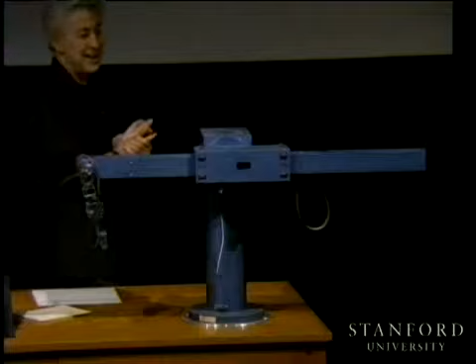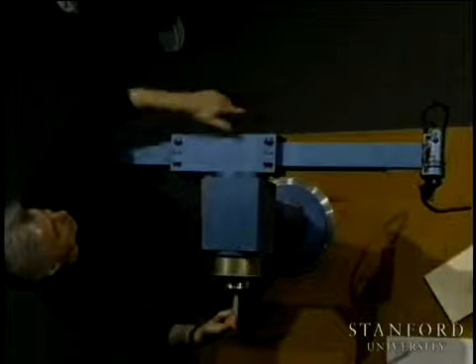Now, over here you have the Stanford Scheinman arm. We saw the Stanford Scheinman arm in pictures many times, and this is actually one of the early arms that was built in the early 70s. You can see here the first joint, the revolute joint, about this axis. Then there is another joint, which allows us to rotate up and down.

I'm not going to be able to actuate it because it needs to be connected to the controller, so we release the brakes. There is a brake right now that is blocking it in the horizontal position, and I imagine you understand why—otherwise it will slip because we have the third joint, which is a prismatic joint.

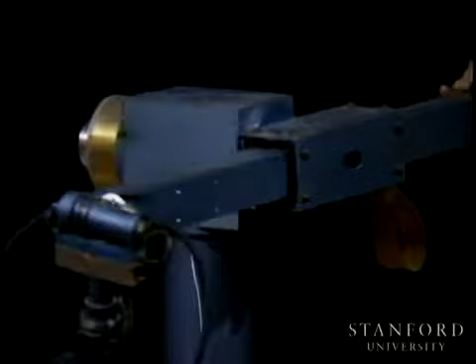The prismatic joint is really an interesting feature about this arm, because you can now take this end effector and, once you decided the direction, quickly reach in that direction and advance the arm. Well, this has a limitation: you can move up to here, and you have another stop about here.

I mentioned about the wrist, and the wrist is here, and it has 3 degrees of freedom. So if we look at this wrist, you can rotate it about this axis. You see this motion? This is joint 4, and joint 5. And joint 6, which is this axis.

So something very interesting happens when joint 5 goes to 0, and this is what? Singularity. And it's really difficult to see exactly what that singularity is, so I'm going to try to illustrate it.

The idea is, when you go to joint 5 equal 0, this is the zero of joint 5. What happens is, this axis of rotation number 4 and the axis of rotation number 6—do you see them? One like this and one like this. These two axes become collinear, right? So for this position and orientation...

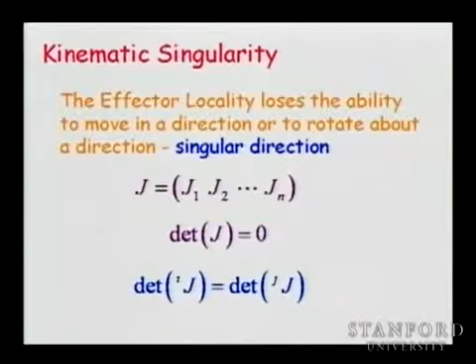Is it because the determinant is preserved by conjugation by another matrix? Yeah, by the rotation matrix. Because to go from a Jacobian in frame J to a Jacobian in frame I, all we need is to pre-multiply by a rotation matrix like this. So if you are in the 6 by 6 spatial case, linear velocity and angular velocity, the Jacobian in frame A can be transformed into a Jacobian in frame B by pre-multiplying the Jacobian with a matrix that has 2 blocks of the same rotation matrix that transforms the descriptions from A to B, and that will give you the matrix in B. Now if you take the determinant of these, the determinant of the Jacobian in B is equal to the product of the determinant of the two matrices, and since these matrices are orthonormal, their determinant is 1, and that means we have this relation. Okay? Okay, good.

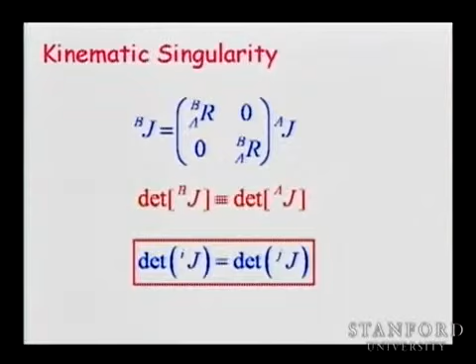Remember this, and remember that you can use it to simplify the expressions and immediately analyze your determinant. Now, once we set the determinant of the Jacobian to 0, we immediately see the singular configurations, because in the expression of the determinant, as I said, the determinant will come up as a product of expressions S1, S2, S3, etc. Each of those expressions, when it vanishes, makes the determinant equal to 0. So if you have multiple singularities, they are here, and you just set each of those expressions to 0 and you get your singularity.

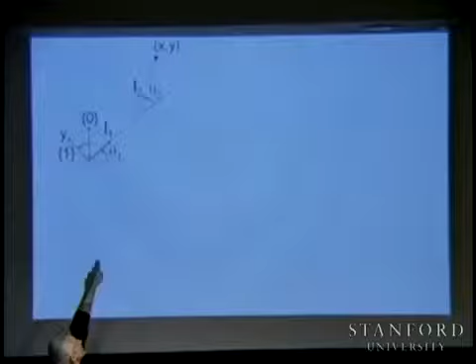Let's take the simplest example possible, which is a 2 degree of freedom mechanism, and see if we have a singularity for this Jacobian. Do you see a singularity here? Which is where? When theta 2 goes to 0 or to pi or k pi, you align the 2 points and you're going to have a singularity. Let's see it in the mathematics.

So I'm going to take x and y. X equals L1 cosine theta 1 plus L2 cosine theta 1 plus theta 2. You remember all of that. And now if we differentiate, we have this Jacobian, right?

As I said, if we determine our expression for the determinant, it comes to be L1, L2 sine of theta 2. And this vanishes when the sine of theta 2 is equal to 0, which corresponds to all the configurations when Q2 is equal to an integer times pi.

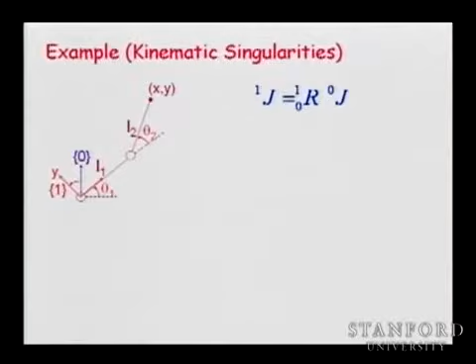So, as I said, you see the Jacobian here, you see its expression. Well, it will become much simpler if we write it in frame 1. To take it to frame 1, we pre-multiply this Jacobian by the rotation matrix 0 to 1. We are doing the rotation in the plane, so it is a 2 by 2 matrix. Don't be confused, all right? So we're just doing it in the plane. And at singularity, this is the singularity when we move the last link to be aligned with the first one. Well, in that configuration, when the sine vanishes, this is the Jacobian.

The notation, when you say cosine 1,2 versus sine 1,2 versus sine 2, what's the difference? So here we say cosine theta 1 plus theta 2, and we denote it C12. Or S12 would be the sine for the sum. Just to simplify, to have a more compact representation.

So this is what is happening. So what do you see here? You see directly how these two columns are dependent, and the rank of the matrix is equal to 1.

So if we think about the displacement delta x and delta y associated with this configuration, if we make a small displacement delta theta 1, delta theta 2, what would be the displacement delta x and delta y? Well, we know delta x is equal to the Jacobian times delta theta. So you multiply, and this is what you obtain. Delta x is going to be 0, the first row is 0. And the second row, I'm multiplying with delta theta 1 with the first element, and delta theta 2 with the second element. You see this? You understand this? Okay, what does it mean?

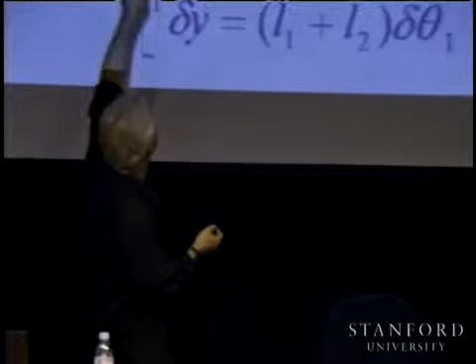For any delta theta 1 or delta theta 2, delta x is going to be equal to 0. And the reason for that is the fact that when we are in this configuration, and when we make a small displacement delta theta 1, if we rotate about this axis, this point will move on the tangent of this circle, right? If you rotate about this axis with a delta theta 2, you go on this tangent. That is, whether we move delta theta 1 or delta theta 2, both of them are contributing to the displacement with a small displacement along this tangent. So there is no displacement that will take place along this direction. And that's why delta x is equal to 0. Do you see that?

How did you get the Jacobian in the last slide? How do we get this Jacobian here, in the last slide? Well, differentiate.

Well, I thought we're done. How do we obtain the Jacobian from x and y?

This is going to be just the linear Jacobian, JV. So we differentiate delta x. The first column will be what? Partial derivative of x with respect to theta 1. So it will be minus, okay?

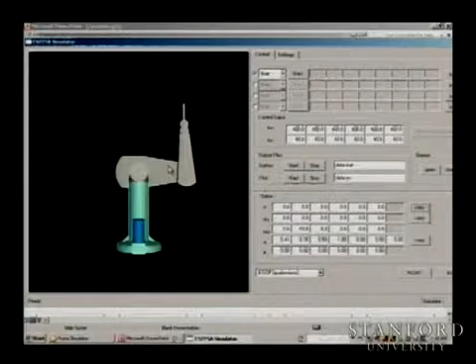What is the name of this robot? The Puma. Very good. So right now the Puma is floating, so if I apply a force to it, it's going to rotate. It's floating.

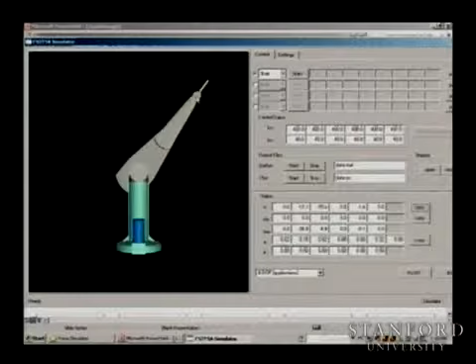So I'm pulling like this, I'm pulling like this. If we pull here, what is this configuration? If you try to move the Puma in this direction, you apply a force, it's not moving. If you try to move in this direction, it moves because there is a small angle, but if this angle is straight, then you apply a force and there is no motion.

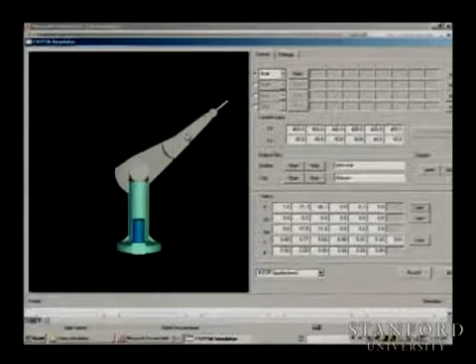And this is the singularity. When you extend the arm, you cannot move along this direction. So if you apply any force in this direction, immediately you have a motion. If you apply whatever force you apply here, there is no displacement along this direction. Okay? You understand the singularity?

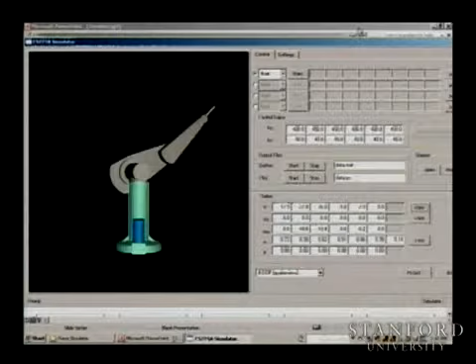Good. So let's close this window.

All right. So now you know the singularity, that configuration that we are calling singular configuration. But really the problem is not the singularity itself, it is the region around the singularity. Because when you come close to that singularity, you start to have a matrix that is ill-conditioned.

And if you try to make a displacement along this direction, so you were in this configuration, and if you are very close to it, you can move, but it's very heavy. It's going to take a lot of force to pull it and make this go up, the elbow goes up. So what I'm going to do, I'm going to take a small displacement delta Q.

Yes? The last slide, why is the Jacobian different, why is the top right L2S2 instead of L2S1? Can anyone answer this question? Instead of frame 1 instead of frame 0?

So this matrix is expressed in frame 1. No, as in that one is frame 0, right? No, the multiplication by 0 to 1. Actually, this matrix is multiplied by this to give you frame 0. So this is J0, this one here.

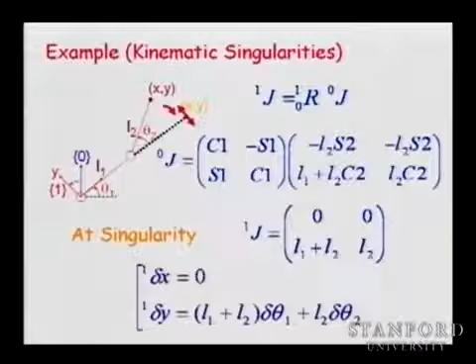All right, let's go to the next slide. So rather than computing the Jacobian exactly, I'm going to make a small approximation of the Jacobian, and compute delta Q that corresponds to a delta X where we are in that singular configuration.

So if theta 2 is equal to 0, very close to 0, so theta 2 is epsilon, you can write this inverse of the Jacobian. So what do you do if theta 2 is very small to approximate your sines and cosines? Sine of theta 2 when theta 2 is very small is almost equal to 0, and the cosine, 1. So if we do that and compute the inverse in frame 1, this is the matrix you will obtain.

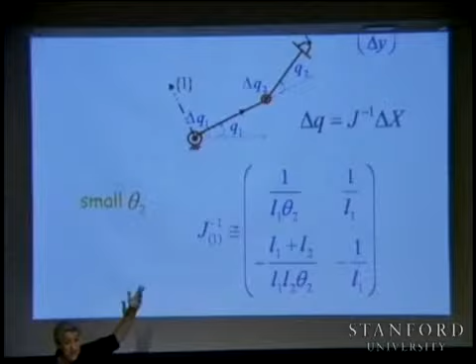And from this matrix you can find the displacement. To make a small displacement delta X, you can compute the displacement required for delta Q. So that means if we want to make a small displacement delta x1 and small displacement delta y1, this would be the expression for delta q1, and this would be the expression for delta q2.

So this is not exact, this is an approximation where we are working around the configuration theta 2 equal to 0. But it is very useful to look at it because as theta 2 gets smaller and smaller, you are dividing by 0. You can see that. So to achieve any delta x, you are going to have a large displacement delta q1 or delta q2.

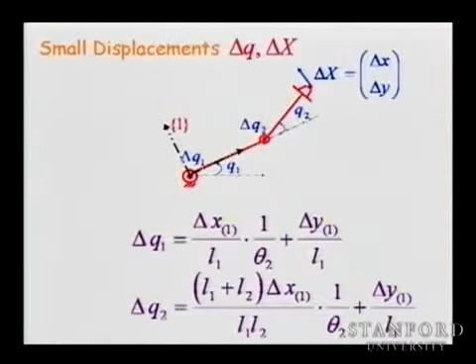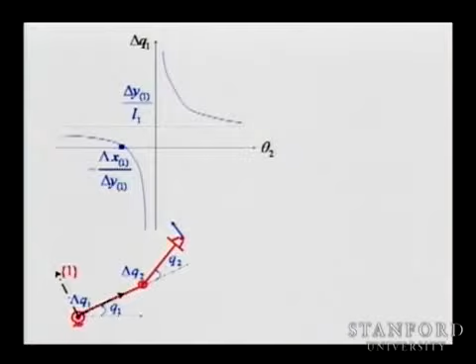Do you see that? In fact, if we look at it graphically, here is the configuration very close. If we look at displacement of theta 2 that comes closer and closer to 0, the displacement delta q1 increases. And the same thing if we come from the other side of 0, we have this discontinuity that means we have large values of delta Q1 needed, or large values of delta Q2 needed.

And when you get to the singularity, there is no amount of value, you need infinite value. So this means that we have to deal with the singularity not only at 0, but also around the region where the singularity is taking place.

Now, in your homework, in our discussions, we always place the problem in the spatial case. But often the robots you are dealing with are planar, and you have this large matrix, and you are going to study the Jacobian of a matrix that is actually non-square. This is the case if we take xy and we take the J omega 0,0,1,0,0,1, we end up with a large description with all these rows of 0.

So we talk about the reduced matrix that you can analyze in the case corresponding to a linear motion for a 2 degrees of freedom or a planar motion. So if you have the case of 2 degrees of freedom, your analysis is done on this 2 by 2 matrix, on the JV part. And you don't have a Z part, so it is just a 2 by 2 matrix.

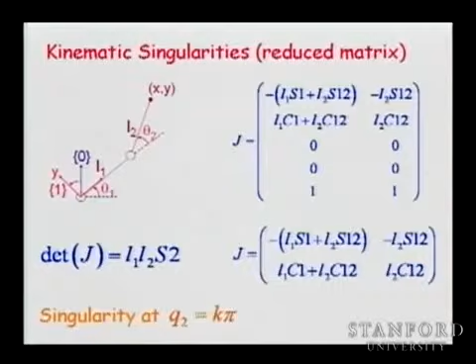In the case of 3 degrees of freedom, you are going to have a matrix like this: x, y, and z, and then you have the J omega 0,0,1. So the reduced matrix in the plane would be x, y, and the last row. Basically you are dropping those 3 rows. So this is your matrix, and you study this determinant, and you will be able to find the singularities associated with this 3 degree of freedom manipulator.

Why do you drop those 3 rows? Because in the case of a planar robot that has 3 degrees of freedom, the matrix that you're going to analyze is going to be x, y, and the rotation about the z-axis.

So you can do it actually with this matrix, but to analyze the determinant of this matrix, you do not know how to do it. How do you take the determinant of this matrix? So to analyze the singular configuration, you can do it from here by forming the matrix J transpose J and reducing it to a 3 by 3 matrix, which corresponds directly to eliminating the 3 rows. So the matrix on top captures the characteristics of rank of this matrix.

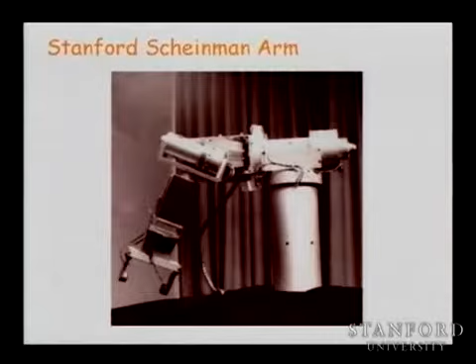All right. So here is the Stanford-Scheinman arm. We just analyzed the singularity of the Scheinman arm by looking at joint 5 when it goes to 0. And in fact, if we do this computation, we multiply the matrices, we do the differentiation. You remember we did this last time and we obtained this matrix.

Let's see what happens when theta 5 goes to 0 in this matrix. So could you tell me what is happening? What we're interested in is to see if there is immediately a dependency between columns, whether at that configuration columns become dependent.

So this is column 1, 2, 3, 4, 5, and the last column 6. Columns 4 and 6 become collinear. Let me write them for you. So the column 4 and column 6 are identical, which means you lost the rank. The rank of this matrix is 5. So you have a singularity.

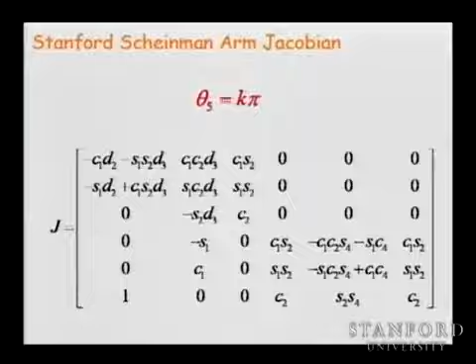This is both for computing x. So this x is x wrist, xw. And this x here is the x at the end effector, xe. So when we go from here to here, there is a constant vector. So xe is equal to xw plus that vector.

So now we're going to see how we transform the description of the Jacobian from a Jacobian associated with this point to a Jacobian associated with that point.

Yes? I think your mic fell off. I'm sorry? I think your microphone fell off. Yeah, you're right. I can see it. Thanks. Okay.

So essentially we have two frames. One frame associated with the frame we selected for the last link. In this case it was this frame, or the wrist point. And the second frame is this additional frame we are attaching to the end effector.

So now think about it. You have a vector connecting the origins. This is the vector Pne connecting the last link frame to this location of the end effector. Now, the linear velocities and angular velocities at that point are transformed to linear velocities and angular velocities at the end point. And the question is, what is the difference between the two?

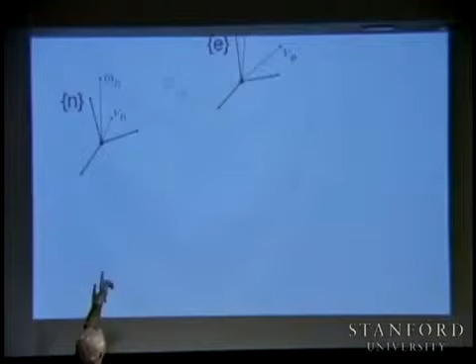So in terms of, if we go back to the robot, and if we think about it, we have some linear velocity here moving this point, and this at the same time is rotating with omega. So the question is, what is the omega here and what is the v here? Could someone tell me what will be the linear velocity at this point, given the linear velocities and the angular velocities that we know at this point? So given we know Vn and omega n, what is Ve and omega e?

They're the same. Okay, so omega e is equal to omega n? Everyone agrees? Alright, that's correct. And Ve is equal to Vn? Okay, who disagrees with that statement? How many disagree? I disagree too. Alright, so some of you still think it is the same velocity, Ve equal to Vn.

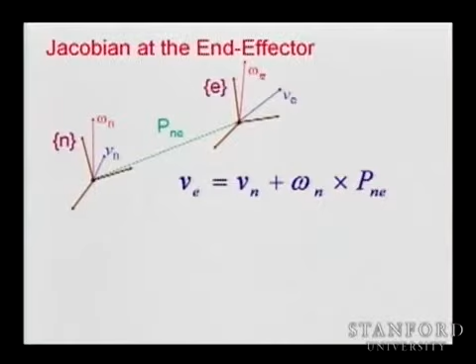You remember the apple? There is an additional velocity coming from the fact that there is an angular velocity here that is going to affect this linear velocity. Even if there was zero velocity at this point, Vn, there will be some linear velocity due to the rotation. So the relationship between the two is like this: Ve is equal to Vn plus omega n cross Pne. Alright? And the other relation is fine. This is correct.

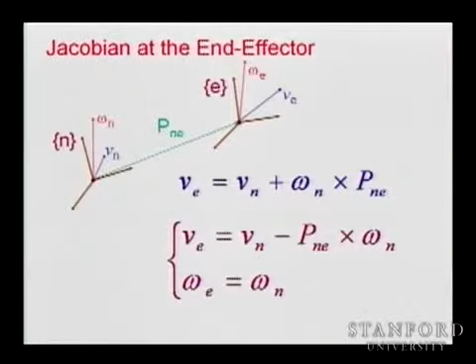So I wonder why I switch and put minus. Anyone knows? Yes, they mean the same thing if you cross something. It is the same, it is correct, cross them in the opposite direction. It goes the other way. It is correct. But so I just replaced that relation and put it in this form.

Why after this form? So basically, Ve, omega e is now linear in Vn and omega n. We put it on the other side, and the reason is I would like to connect the two. And do you see how we can connect the two? What is the relationship between the vector Vn, omega n as a vector and Ve and omega e as a vector? There is some matrix, and this matrix involves what?

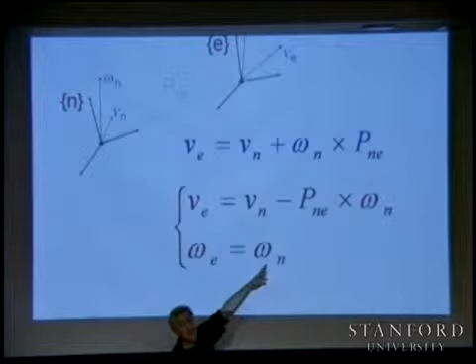Identity matrices, because this is identical, and Pne cross. What is Pne cross? How do we make Pne cross as a matrix? Exactly, so we use the cross product operator. So actually, this writing allows us to find this matrix, immediately connecting Vn, omega n to Ve, omega e. What is on the diagonal?

Because Ve is equal to Vn minus Pne, the first diagonal block is identity, and the second omega e is going to be identity times omega n, so there will be zero identity. What is on the upper block on the right? It is minus the cross product operator. So basically we have the identity on the diagonal, we have 0, and we have minus Pne hat.

So now we have a linear relation between the two, and it involves just this vector connecting the wrist to that point, and we are taking the cross product operator of that vector. Now, when we do this computation, you have to be very careful to make sure your Pne vector is described in frame n most of the time. It's just like a straight line along the z-axis, a small length along that z-axis, so it will be 0, 0, 7.

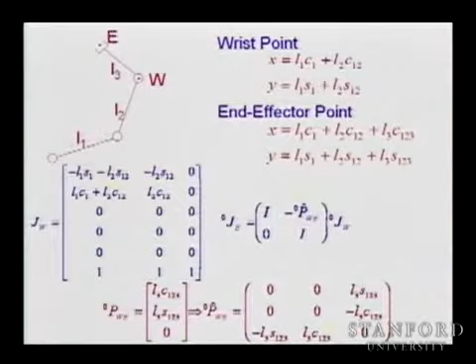There is here an example of a Jacobian computed at the wrist point, a Jacobian computed at the end effector point, and we are computing this vector w from e to 0. I'm going to skip it because we don't have time, but once you have it in your handout, go through it and you'll see you can compute Je from this Jw simply by computing this operation associated with the vector connecting w to e. And what we did is we computed p in frame 0 and found the operator in frame 0 directly. Please take a look at this.

So I'm going to move on because we are now going to discuss something important about the Jacobian. We already started to introduce this a bit, but the fact is the Jacobian is very useful not only to analyze velocities but also to control the robot. Most industrial robots are actually controlled just with the Jacobian, because this Jacobian is always connecting your desired position and orientation of the end effector.

You have some delta x here, and if you know how to control the joint motion, all what you need is to say, okay, I'm at this configuration, I would like to make a small displacement delta x. What would be the small displacement delta q? That can be obtained from the Jacobian, because the Jacobian gives you this relation, and if you are outside of the singularities, you can compute delta theta that corresponds to your delta x. This is the relation that can be used directly to compute the displacement delta theta to follow what you would like to achieve with delta x.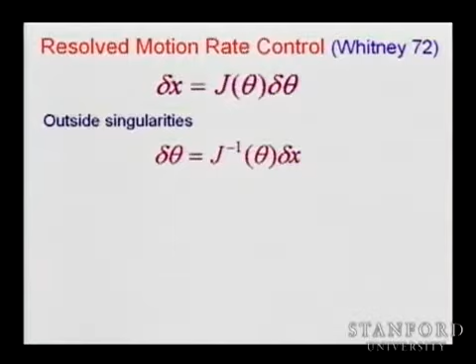You start from theta, you know theta, you know your x, you can compute it from the forward kinematics. You want to go to x desired, then you can compute delta x by taking x desired minus x. Hopefully this is small, so you can use the Jacobian. And then you can compute the corresponding delta theta to this delta x using this relation. Then you know theta, so you control the robot to move from theta to theta plus delta theta.

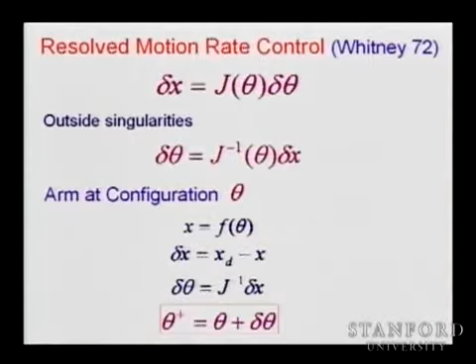You see this algorithm? Very simple. You measure where you are, you know your theta, you know your x, and you want to make a small displacement delta x. All what you need to do is to compute this delta theta from your Jacobian. So basically, you have a sort of controller that is using the Jacobian to compute this error between your desired position and measured position, computed from the forward kinematics as a function of your Q's, and that will give you a delta Q that will distribute to each of the joints and ask the joints to track.

So this is the resolved motion rate control proposed by Dan Whitney back in the 70s. This simple algorithm, if you don't really care about dynamics, if you don't care about force control, contact of the robot with the environment, this is fine. That will work, and if you are outside of singularities, this will take you through. But obviously it's not going to work very well because you're going to have problems with the accelerations. If you're tracking a motion, you will have a lot of errors. But still, if you have just small displacements and slow motions, this is going to work.

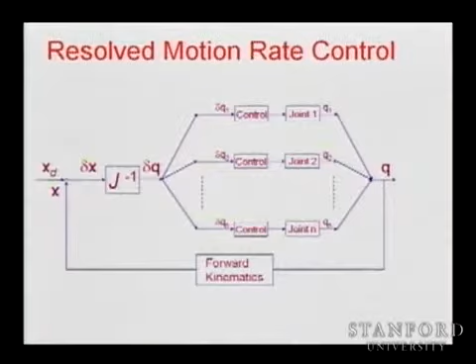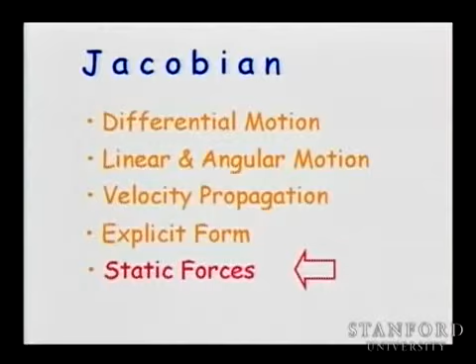The last point in our discussion deals with static forces, and again the Jacobian is going to give us the answer. We saw that with this Jacobian we are able to understand the velocities produced at the end effector given the joint velocities, but we're also going to see that the Jacobian is part of the relationship between forces exerted by the end effector and torques produced at the joints. The same matrix. So how can we start with this?

Okay, let's go upstairs. So now we're in the robotics lab. James was the TA, I took that photo when he was TA, but it was a couple of years back. So how do you open this door?

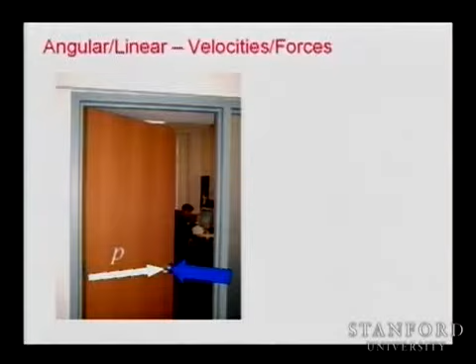Come on, we're doing it with the robot. So you take your hand, and after turning the knob, you push a little bit and it's going to rotate. You see how it's going to work? So let's analyze it. You're pushing here, at some location, and you have the axis of rotation. So there will be a linear velocity - you're pushing with some velocity, so at that point there is some linear velocity, corresponding to that velocity there is some angular velocity about the axis. You see that?

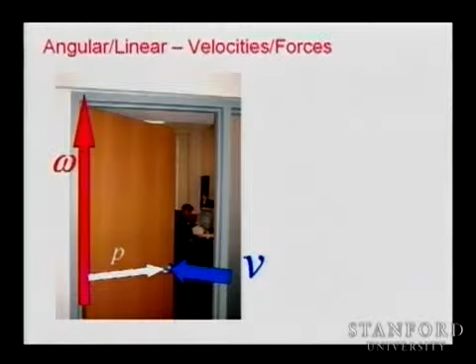Now we can also think about the forces I'm pushing with. The linear velocity is related to angular velocity by this relation, we saw this. The forces - if I apply a force here, there will be a torque. Actually, I could have this door actuated with a motor, producing a torque, and that corresponds to a force here, and there is a complete relationship between the two. Do you know what is the relationship between torque and force? The cross product, but in this way - the torque is equal to P cross F.

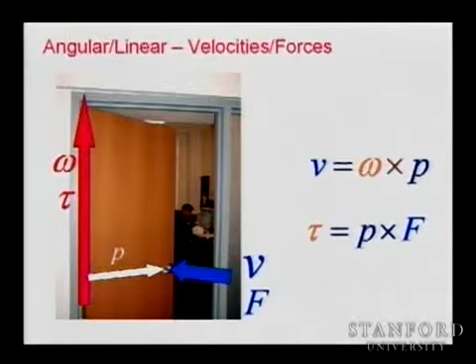So the torque now is on the other side and the F is on this side. So V and F, you see V and F, they are crossing in the two equations. Actually, the first equation represents sort of a Jacobian relating velocities V and omega, or theta dot. And the second relation is representing sort of the transpose of that Jacobian. And we're going to see that.

So let's go and analyze this. We have omega, we have linear velocity, and this is the relationship, we agree? Here we can write it in this form: we can say V is related to omega by minus P hat.

Torque - so if we want to produce a force there, you can apply a torque, and that would be equal to P cross F, which can be now represented by P hat F. Let's take that and put it really similar to this - so it's minus P hat, so it is identical to that. You see this transpose I'm writing? Because the operator is anti-symmetric, you get minus the operator equal the transpose. So I'm just writing minus P hat transpose. So basically this is the Jacobian and this is the transpose of the Jacobian.

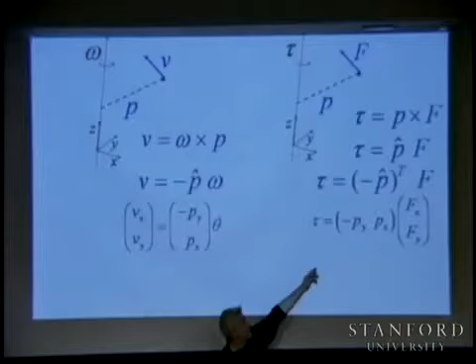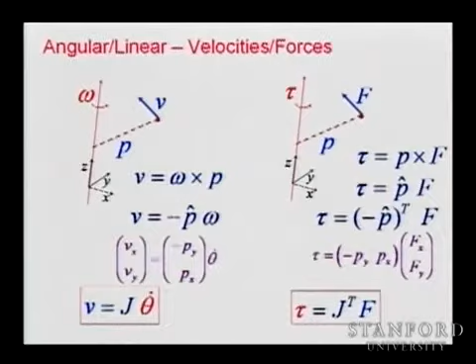And if we want to really check it out, just put a frame and compute this operator. It will be minus py, px - these are the coordinates of this vector, px, py. And if you put it there, it is this. So basically there is a duality between - this is for one degree of freedom, a door is one degree of freedom - so there is a duality between velocities and forces. We can compute the torque corresponding to the forces acting at the point by looking at this matrix minus py, px, or we can compute the velocities through this. So this is the Jacobian and this is the Jacobian transpose, and the relationship between forces involves the same matrix in transpose.

Remember these two relations - they are fundamental relations in the kinematics of robots, but they are going to play a very important role as we go to dynamics and control. Velocity and forces, okay?

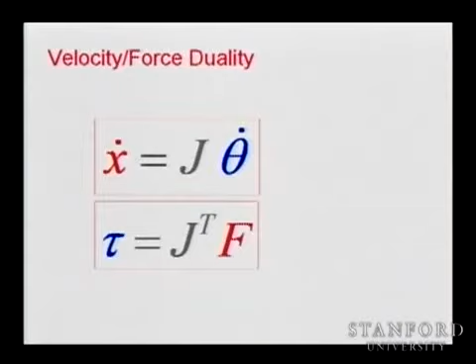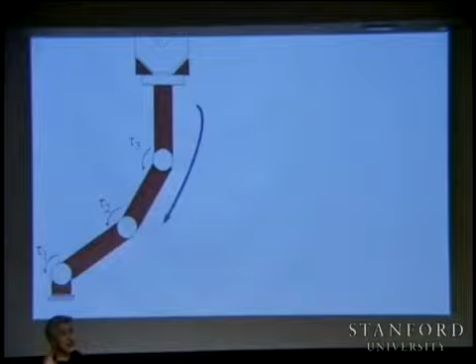Well, there are many different ways of actually establishing this relation. You remember when we wanted to establish the relationship between velocities at the joints and velocities at the end effector? We said we can do propagation of velocities, compute the propagation from the base up to the end effector, and find the relationship to extract the Jacobian. Well, you can do the same here. You can say my robot is in contact with the environment and it is applying to the environment a force F and a torque or moment N. You can start from the end and go down, propagate velocity, propagate forces, and find the relationship between forces at the end effector and torques applied to the joint.

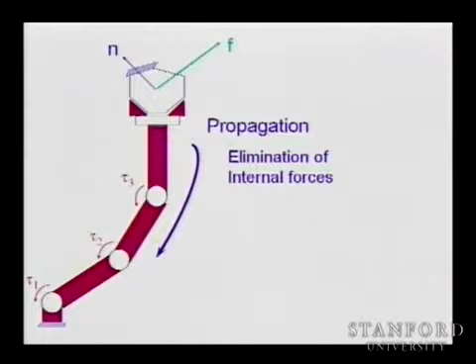This propagation leads to the Jacobian transpose after elimination of all internal forces, because when you push with the robot, the structure of the robot takes part of the forces and the other part goes to the joints, which support it with motor torques. So when we do this elimination, we have to be careful to project at each step those forces onto the axis of the joints, to make sure we're looking at the active part of the force.

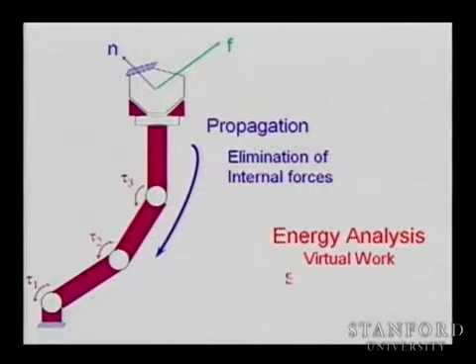We're going to briefly look at this, and then I'll show you another way of doing the analysis using the virtual work principle. So how do we do this?

If you have a problem with the application of forces and you're reaching static equilibrium, you try to establish the relationship between those forces and torques. It's static equilibrium because you're applying these torques, which push the environment, and the environment pushes back with equal and opposing forces and moments.

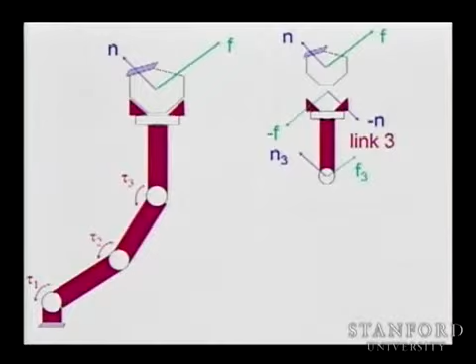So how do we do it? We just break it down into pieces, and we take each rigid body and say each rigid body has to be at static equilibrium. We start from the top: this is the forces applied to the environment, meaning the last link receives the reaction forces of the environment, minus F and minus N. On the other side of the link, at the joint, it receives some forces F3 and N3 on link 3. You do the same for the other links.

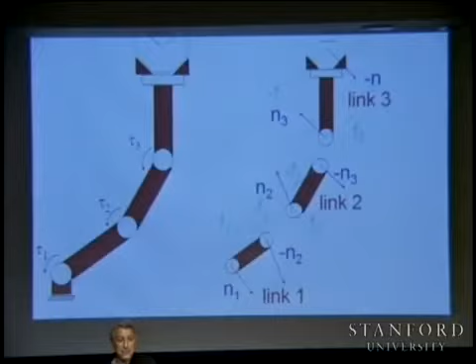Then what do you say? If each of these is at static equilibrium, how do you express that? What are the conditions? Sum of the forces is equal to zero, and sum of the moments computed with respect to any point on the rigid body is equal to zero. That's it, and you have static equilibrium.

So this is the last link. Now if we take one of them and express what you just said—static equilibrium when sum of forces equals zero and sum of moments with respect to any point equals zero—then you can find a relationship, and those relationships take this form: forces plus equal to zero, moments plus the moment associated with the force Fi+1 equal to zero, if I'm computing at that point, the origin of frame i.

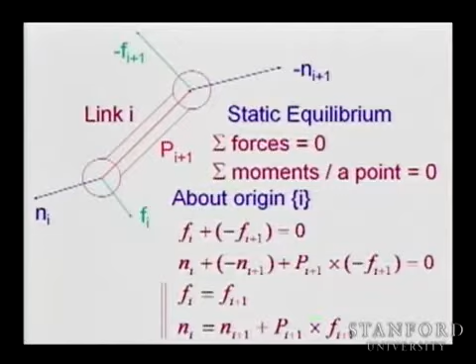From this you have recursive relations, so you can compute back propagation: Fi as a function of i+1, Ni as a function of these. You back propagate and extract the Jacobian, but before that, what you need to do is project onto the axis and make sure you're getting the forces as you propagate.

At the joint, if it's prismatic, you project the forces, because the only thing that comes through is a force that makes it translate. For a revolute joint, the forces are supported by something—what counts is the moment. So you project the moment, and the torque is obtained by dot product with the zi axis, giving you this algorithm.

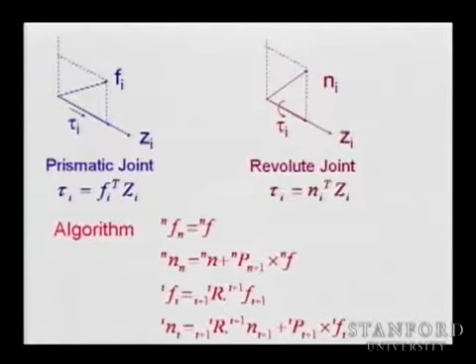Now you propagate from the forces you're applying back to the ground, and from there you find your Jacobian transpose. In this case, the Jacobian is embedded inside your numerical calculations—that is, you're propagating from the end to find your Jacobian.

So the Jacobian can be computed by velocity propagation. You can compute the Jacobian transpose by back propagation of forces, or, as we saw, the simplest way is to compute the Jacobian explicitly by looking at the structure. Once you obtain the Jacobian that way, you can immediately state the Jacobian associated with the forces.

We can redo the analysis completely differently. This analysis relied on taking the mechanism, breaking it into pieces, and eliminating the internal forces to find the Jacobian. But we know something about the mechanism, about active forces and internal forces, that allows us to make a more general statement without needing to do this force elimination—this is the virtual work principle.

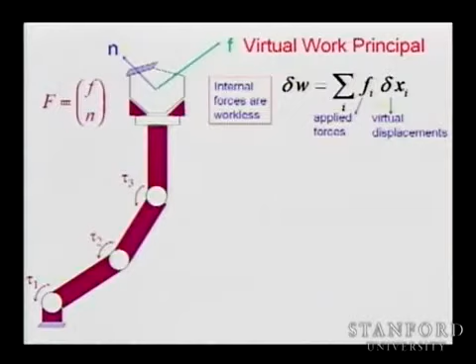So we're going to think about the work. Work is force times displacement, right? So we can think about the work done in a small displacement, and if there is displacement, there are forces acting along that displacement. What we're going to say is that at static equilibrium, this is the statement.

What does it mean? If we take all these active forces acting along the axis of displacement, all external forces are active. If you push on the robot, it's going to move. If you apply a torque at the joints, it's going to move. Internal forces are not going to produce any motion; they are taken by the structure.

So now we need to deal with two things: the forces in that vector F and N, the forces applied by the environment, and the torques. I'm going to write this relation: the virtual work done by all these forces has to be equal to 0 if I'm in static equilibrium. Otherwise, there will be motion.

So what is the work done by the torques? Well, the work done by the torques is torque transpose delta Q, the dot product between delta Q and the torques. And what is the work done by the external forces? The dot product between F and delta X, because F is acting along the X direction, X, Y, and Z.

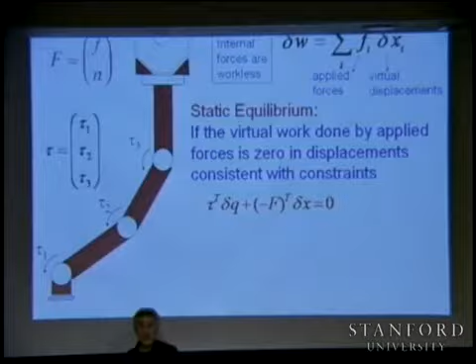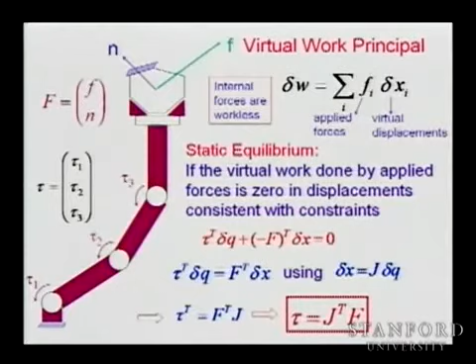Jacobian, very good. So let's use the Jacobian, and that gives you this relation for any delta Q, which by transpose gives you your answer. So basically, this whole thing becomes very simple if you just look at the principle that abstracts the problem. You could go and look at internal forces, compute them, eliminate them, and then find the relationship between the active torques and the external forces F, or you just state it directly.

Now, if I'm going to apply 1 ton, I mean 1,000 Newton, let's see, we do the same thing. We put 1K of force along the y-axis in this case, along this direction, and I'm going to compute it at this configuration: L1, L2, theta 1 equal 90 degrees, theta 2 equal 0.

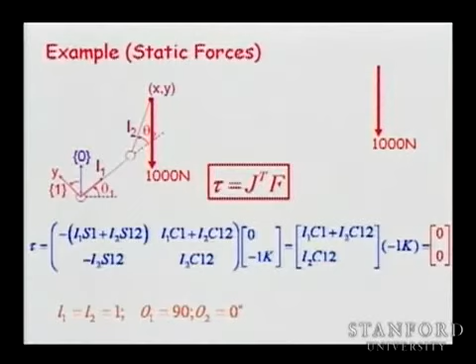Do you know, can you imagine this configuration? This is this configuration — it is the configuration when the whole arm becomes vertical, when joint 1 and joint 2 are aligned. And the answer is 0.

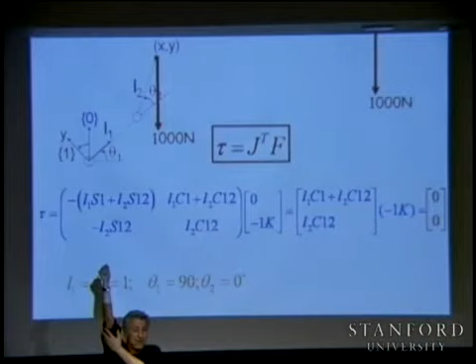What happened? You're putting the arm here and you're pushing down. You can take any force because of the singularity. So at singularity we cannot move, but we can sustain a lot of forces or produce a lot of force with a small amount of torque. When you come closer to a singularity, to produce a large force, you just apply a small torque and you get a huge amount of force. And when you are at the singularity, you can sustain it.

And that's why when you are lifting something heavy, you go like this — you don't lift it this way, you just go like this. You use the singularity of the arm.